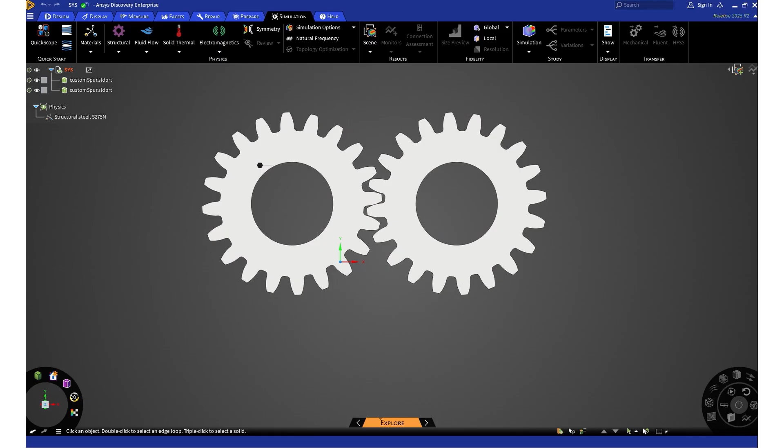And we'll talk about the boundary conditions and the meshing and the development of the model. So to begin with, we'll open Mechanical, and I've already created this model, so I'll walk you through the steps that I have gone through. We imported the geometry from Discovery, and you can see that we have two solid parts. We have one part for each gear. They're both made of structural steel, and we've just left the geometry as that.

On materials, the only materials we're using are structural steel. And then what we did is we came down and looked at our connections. On connections, we'll go to connections contacts. And what you want to develop here is a frictionless contact between the two teeth. The default here will give you several contact regions. It's best if you go in and modify those regions so that the only contact surface that you have is right between the two gear teeth that are going to be in contact.

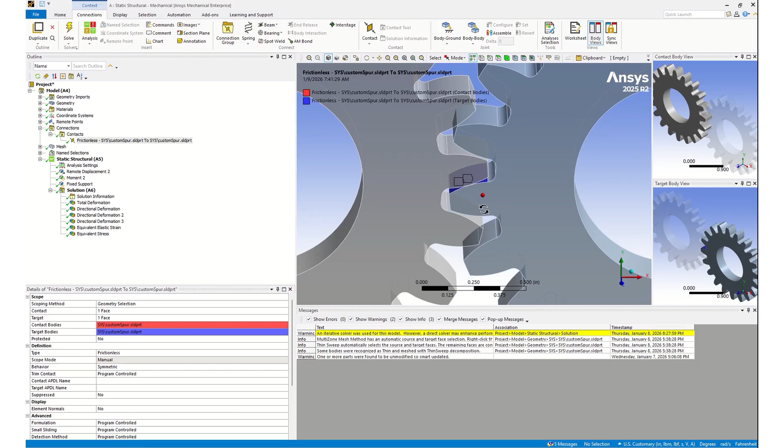Now, if you have a model where multiple gear teeth are going to be in contact, then absolutely you'll have more than one face in each one of the contact and target locations. But in this model, we have one tooth that will be in contact with each other, and so we are going to have the contact face be the face that is being pushed in to the target. So in this model here, we're going to set boundary conditions such that this spur gear is fixed and this spur gear is rotating into and compressing against this fixed gear.

And so when we come down here on our contact, we want to make sure that we select the frictionless type. We can be symmetric. And then down here on the interface, we want to make sure that we select adjust to touch. So you have several options here for the interface treatment. Make sure you select adjust to touch. What that does is that sets the two faces in contact at the beginning of the load application. It accounts for any small gaps that may be left due to your geometry model.

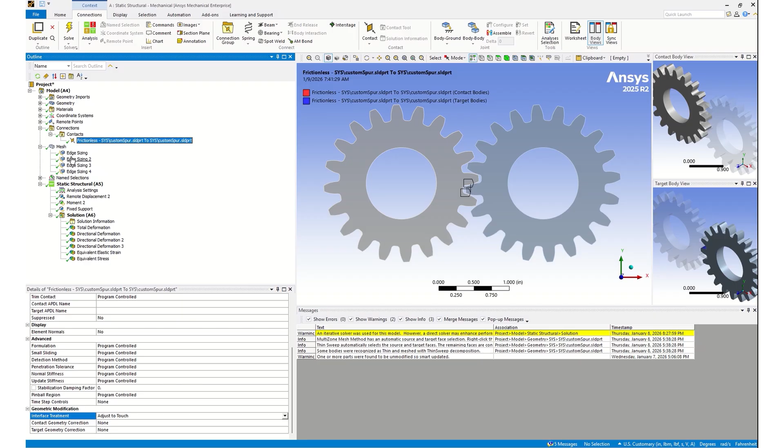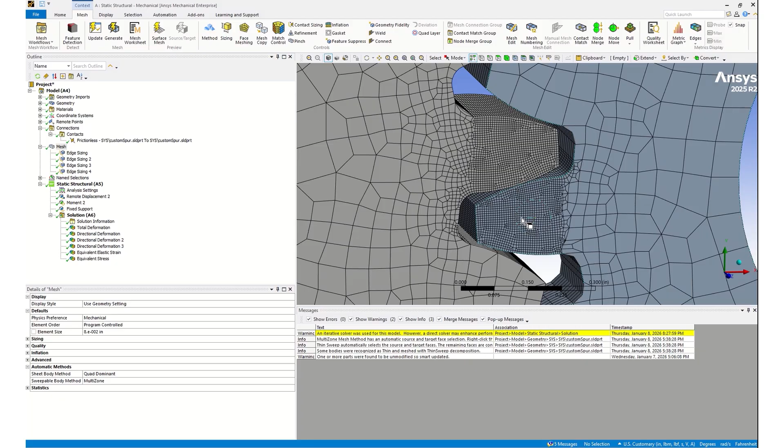So if we look at meshing this model, what I did is I came to mesh, and you want to make sure that you have a really good mesh in the area of the contact if you're focusing on the contact stresses. And so you can see that the two gear teeth that are actually in contact are full of elements. And the elements look pretty good in that they're good quads, mainly equal size on each side of the elements. And then as we propagate out into the body of the gears, we have fewer and fewer elements.

The way I did this was, if you go to mesh and right click, you can insert a sizing. And that's how I inserted these 4 different sizings. And then on the first one, I did an edge sizing. And what I did is I selected these edges here on the first gear.

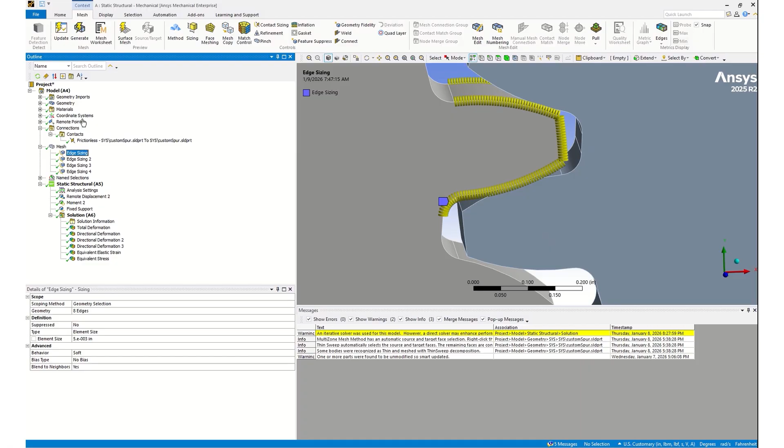And so if we come up here to geometry and click on geometry and hide this body, we can now come back down to edge sizing, and you can see that the edges that I picked are the edges on the outside of the tooth. I did not select the edges going into the tooth because I don't need the density going into the tooth that I want on these edges. So I selected these 8 edges, and then I came down and I entered an element size of 0.005 inches, and the behavior is soft.

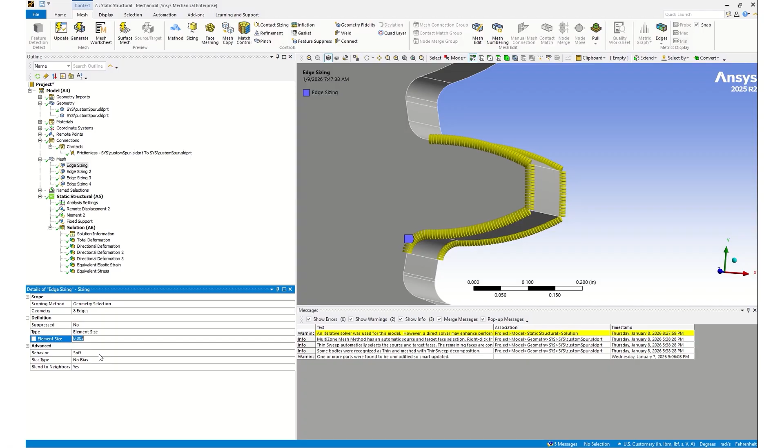Then I went to edge sizing and I picked these horizontal lines, or the lines into the tooth or the gear, and I made the spacing there 0.02, so quite a bit larger. And that gives me a good mesh when I come back up here now and look at the elements just on this particular gear tooth. You can see that I could have made this maybe a little finer, but in general, that's a pretty good mesh for a gear tooth.

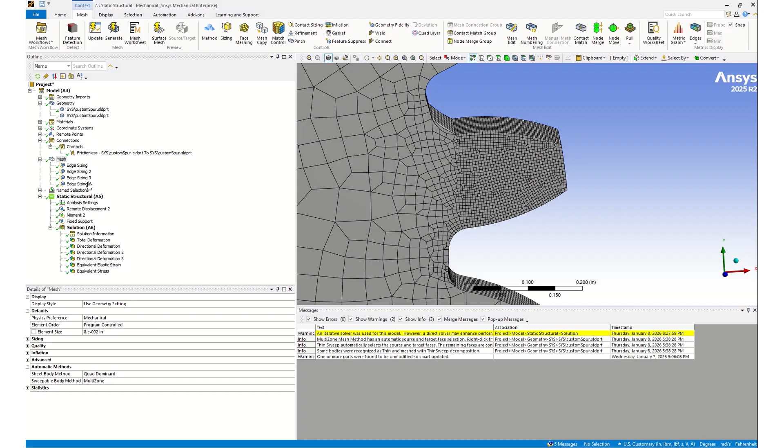The other thing that we could have done is in our geometry model, we could have made a face and split the gear tooth off of the body and meshed that body separately. But because I didn't do that in my geometry model, I'm using these edge sizing tools in my gear tooth mesh. These other edge sizing inserts are for the other geometry.

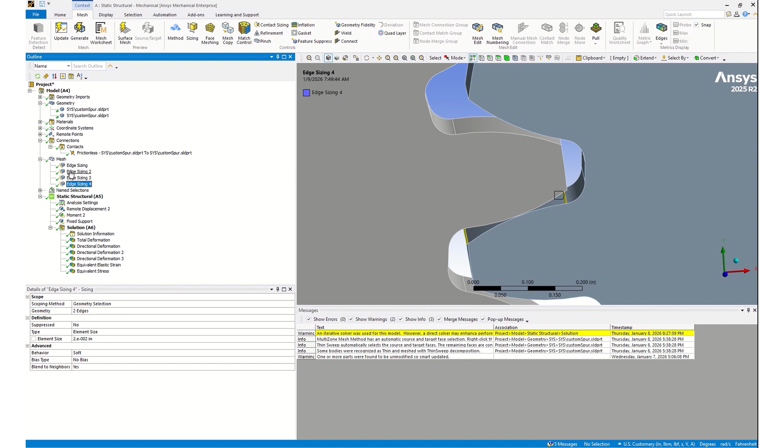So if we come back up to geometry and right click and click on show all bodies, now when we click the edge sizing here, you can see that they're the same edges just on the other tooth. One thing that you want to also make sure of is down here on the overall gear tooth or spur gears, I entered a value of 0.08. And then coming down here, I selected quad dominant instead of prime quad dominant. And I also selected multi-zone instead of sweep. And those settings give me this good mesh right here. If you don't set these, your mesh does not look quite as good as this mesh.

Now you can spend a lot of time coming up with a good mesh, but when doing contact stresses, your mesh is very critical, and you want to make sure that you have sufficient elements to represent the changes that occur in a contact stress situation. So those are the settings that we had on our mesh.

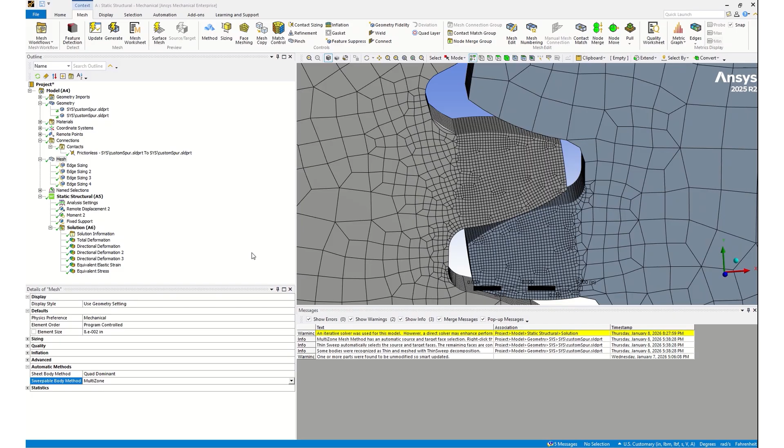Now we want to look at the boundary conditions that we need to apply. So if we close our mesh and close our connections, the boundary conditions again that I want to apply are on this gear, I am going to fix it so it can't rotate. On this gear, I am going to put a remote point in the middle, and then I'm going to put on a remote displacement in the middle of this, and I'm also going to apply a moment. And we will talk about those boundary conditions and go through that process now.

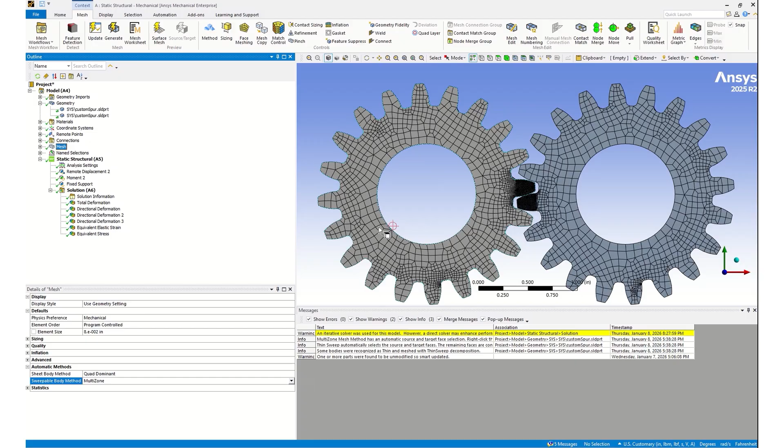So the first thing that you want to do is come up to Model and right click and insert remote point. And so you drop down here and click on remote point, and that will insert this remote point right here. If I open up the plus, I can click on that remote point, and what I have done is I have selected one face. And when you select this face, what it will do is it will put the remote point at the center of that face. So I essentially now have a node where I can apply boundary conditions and loads and constraints in the middle of this spur gear. And so that makes it very handy. So I have that remote point there, and it's on this one face. All these other settings here I can leave as the default.

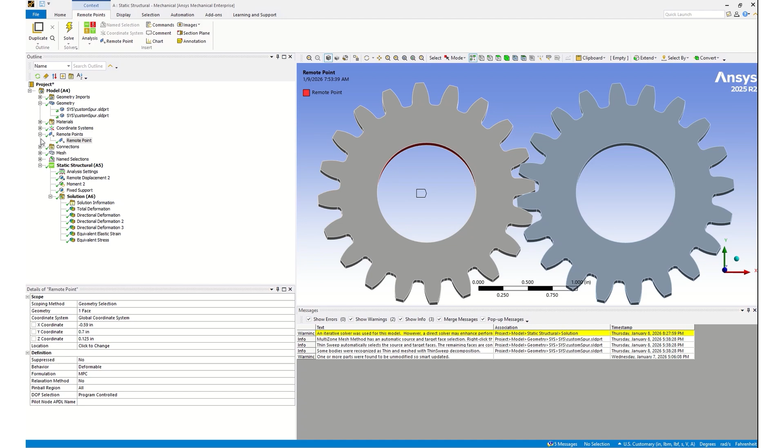Now I can close that remote point, and when I come down here to apply boundary conditions, I'm going to look at a remote displacement. So I'll come up here to supports, click the drop down, and then click on remote displacement. And this will insert this remote displacement right here. And if I click on that, on the scoping method, the default will be geometry selection, but we want to click on remote point for the scoping method. So you'll click on remote point and use that as the scoping method. Then down here on remote points, if you have multiple remote points, you can name them and you can click on the remote point that you want to use. Since we only have one remote point, we only have one option here, and we will enter that.

Now we've identified the remote point that we want, and we can come down here and apply the displacement boundary conditions that we would like to have. I have entered a 0 in the X, Y, and Z directions and 0 degrees of rotation in the X and Y. I've left the rotation in the Z direction, which is into the board, into the plane, free. And now with that free boundary condition, it's able to rotate about this axis.

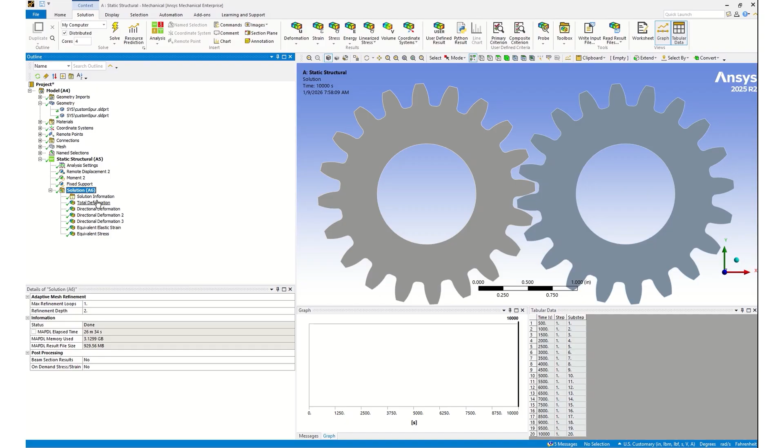So now with these settings, I'm ready to go into solution and pick the options that I want to see. I just used the basic ones where I'll look at the total deformation, equivalent stress, and then directional deformations. And then you can go and solve the model.

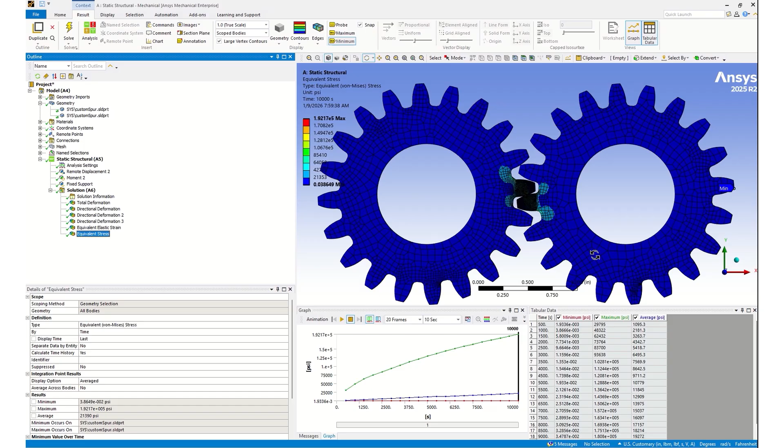So if we look at our solution and click on equivalent stress, we can see that most of this outside gear is not stressed, but certainly where we have contact, our model shows significant stresses. If we zoom in here and reposition, you can see that our contact stresses look really good in that we have hot spots on both sides that are in line with each other. They're in line in the contact region, and they're maximum and then decay relatively quickly as we propagate into each tooth. You can also see that we have higher stress concentrations at the root of the tooth, where we will have a larger bending stress due to the contact.

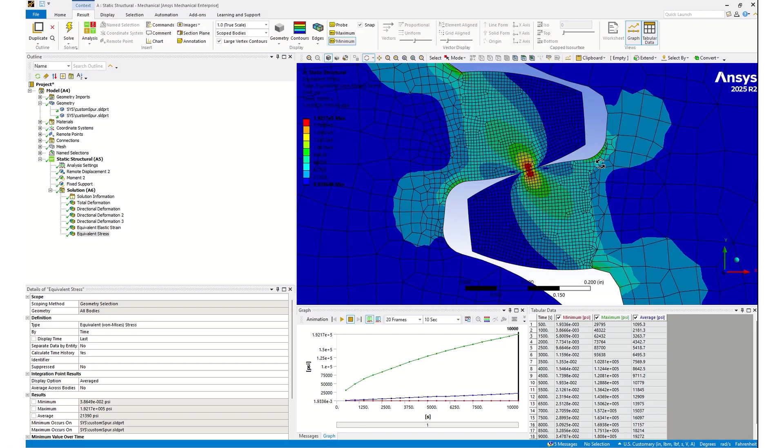So if we zoom in on this, we can come back up to geometry and click on one of the bodies and hide that body, and now come back to equivalent stress and rotate this and see what our stresses look like through the spur gear tooth. And you can see that on these edges is where we get the hottest stresses. And then in the main body, it's not quite as significant.

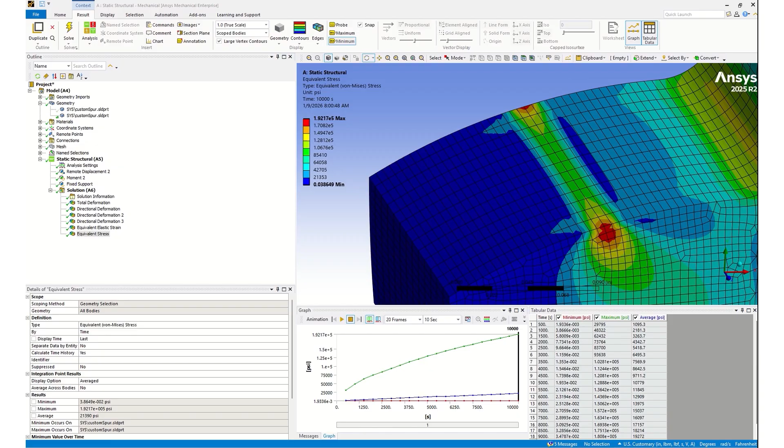We can also orient this tooth and look at it again in the Z direction, and then create a section plane. Move it more to the center, come up to section plane, and draw a section plane through this tooth, kind of through our hot spot. And now we can rotate this and look at the stresses inside the tooth. And we can actually see that these contact stresses are relatively high inside the tooth down underneath at a given depth.

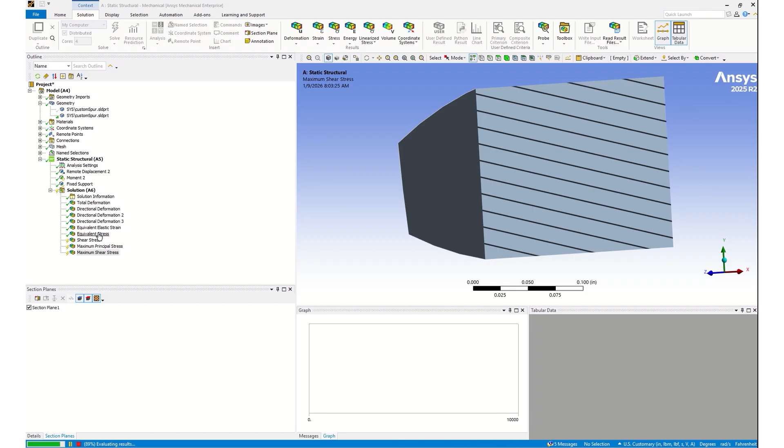Based on these results, it might be more informative to look at other stresses besides just the equivalent stress. So if we come back up to solution and go to stress, we can look at some of these other stresses, such as the shear stress. We can look at a maximum principal stress, and we can look at a maximum shear. And now when we click solve here, these new stress parameters will be computed relatively quickly.